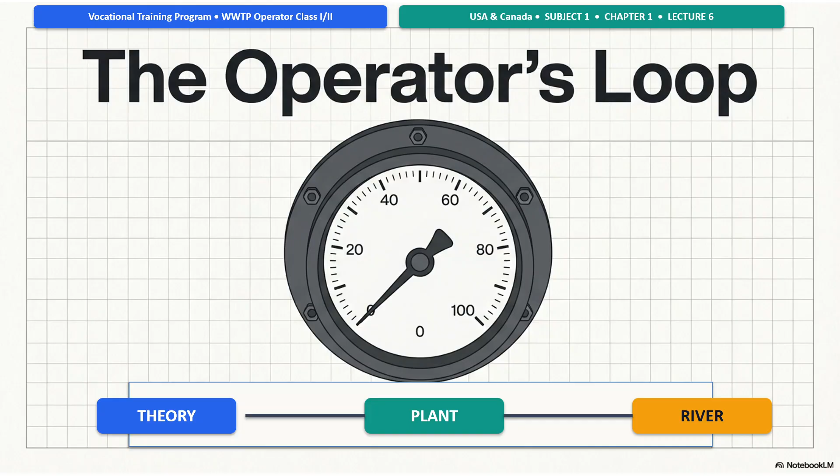Before we touch any wastewater words, I want you to notice something. When you cook, you don't just follow a recipe. You think, what is happening in the pan? What is it costing me? Is it safe? Will it turn out okay? That is not school thinking. That is real life thinking.

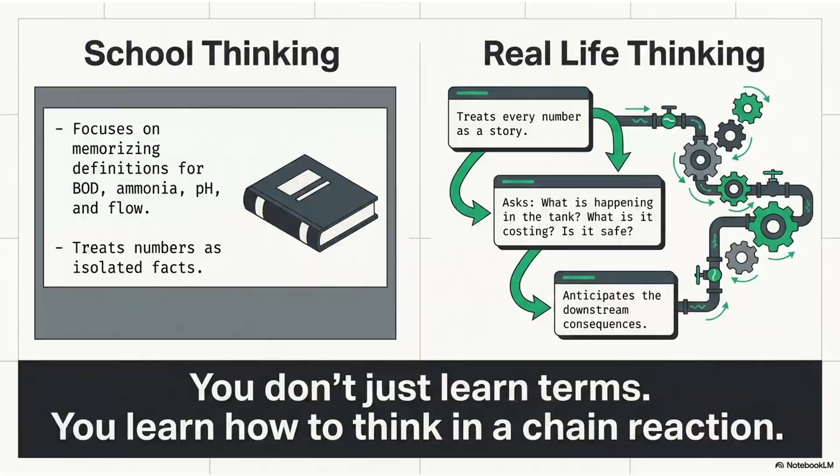Today I'm going to show you the most important thing an operator learns. You don't just learn terms, you learn how to think in a chain reaction. Because in this job, nothing is just one number. Every number is a story, and every story has consequences somewhere downstream.

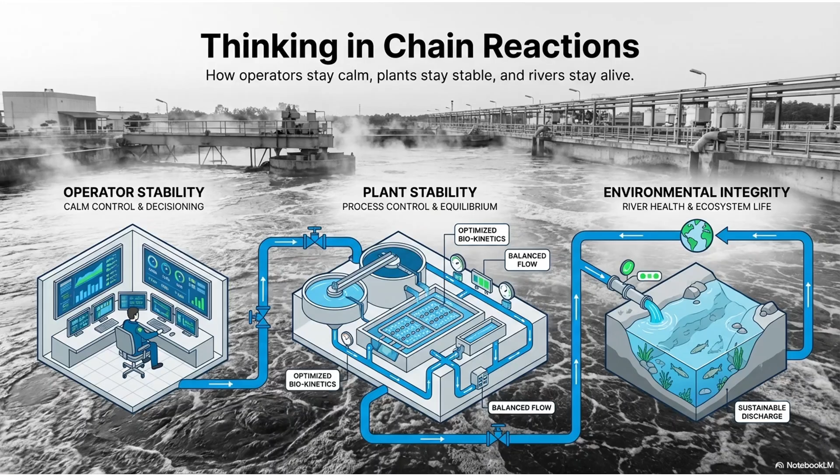So here's the promise. From today onward, whenever you hear a wastewater term, BOD, ammonia, pH, flow, you will not just memorize it, you will run it through a loop. This loop is how professionals stay calm, how plants stay stable, and how rivers stay alive.

Picture the plant like a living city. It has streets and gates. It has workers. It has rules. It has a rhythm. And most days, the rhythm is predictable.

But today, it's Monday. Rain is falling, the streets are shiny, the storm drains are awake, and somewhere upstream an industrial building opens a valve. Maybe they cleaned a tank. Maybe they dumped a washdown. Maybe it was an oops.

But here's what matters. A stronger than normal slug hits the sewer. Not a little change, a sudden punch. The wastewater comes in thicker, darker, heavier. And the lab tech at your wastewater plant looks up and says, 'Influent looks strong today.' You hear one phrase from the control room: high BOD.

Now I'll ask you something, and wrong answers are welcome. What do you think happens next? Does the plant remove it all? Do the bacteria just feast on more BOD automatically? Hold those thoughts, because now we're going to run this event through the operator's loop.

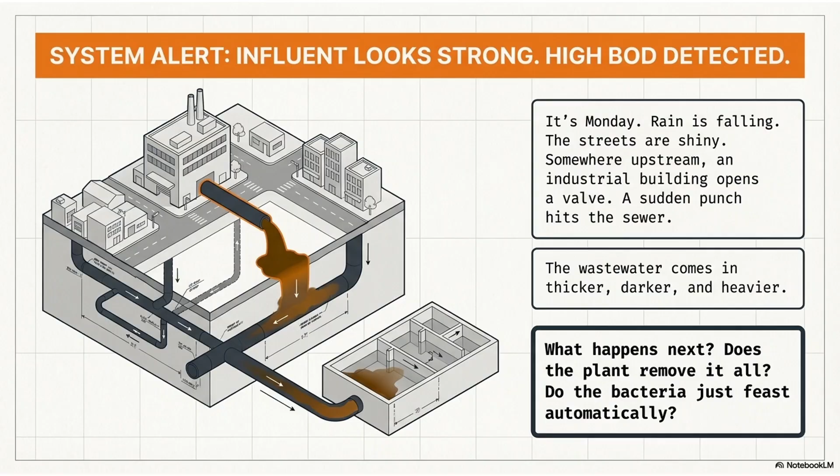What does this mean chemically? What happens in the tank? What happens to cost? What happens to safety? What happens to compliance? And then one final zoom out: what happens to the receiving river?

This is the theory, plant, river loop. Not because you're trying to be philosophical, but because this is how you avoid getting blindsided. This is how you stop being the person who reacts late. This is how you become the person who predicts the movie before it happens.

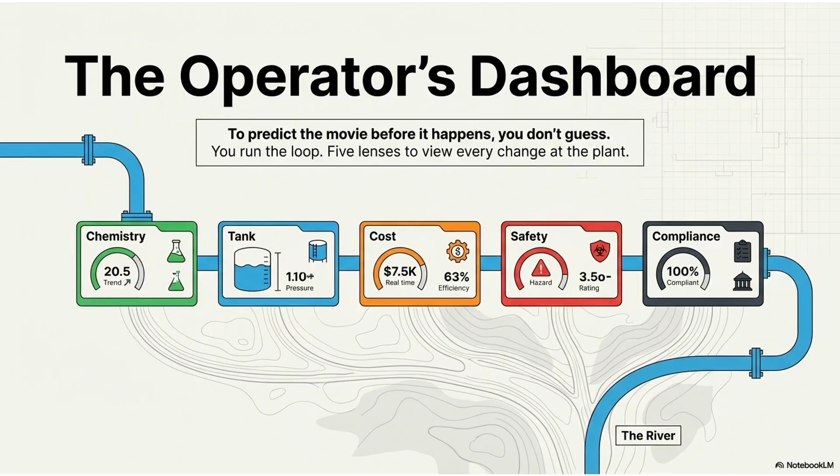All right, high BOD event. Let's run it. Loop step one: what does this mean chemically? When we say high BOD, in plain language, we mean there is more oxygen hunger entering the plant. That's it. More food for microbes, yes, but more importantly, more demand for oxygen.

BOD containing waste is like a crowd walking into a small restaurant. The restaurant only has so many chairs, only so many cooks, only so much air inside. If 20 people walk in, the room is fine. If 20,000 people walk in at once, the restaurant is stressed. There is a possibility that the restaurant does not have enough resources to feed the hunger of all 20,000 people because the load is too sudden and too high.

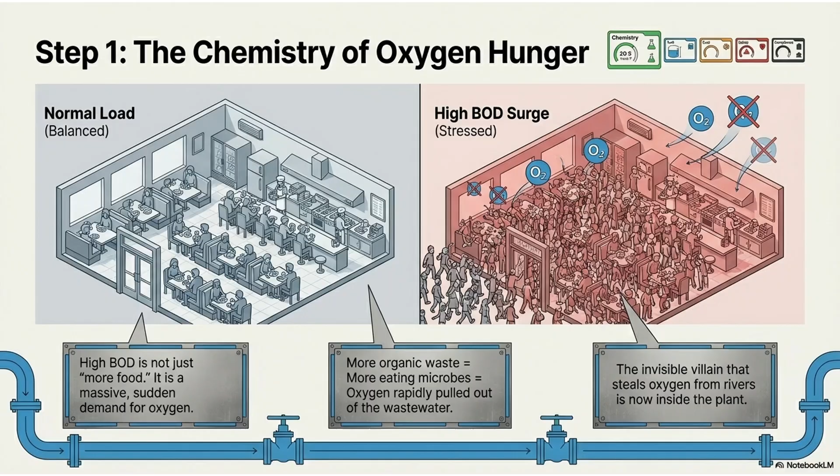So chemically, high BOD means more organic waste has entered, more microbes will be eating, more oxygen will be pulled out of the wastewater by these microbes. I want you to connect this to what you've already learned earlier in this subject. We talked about invisible enemies. We talked about BOD stealing oxygen from rivers. Now we're seeing the same villain, but inside the plant first.

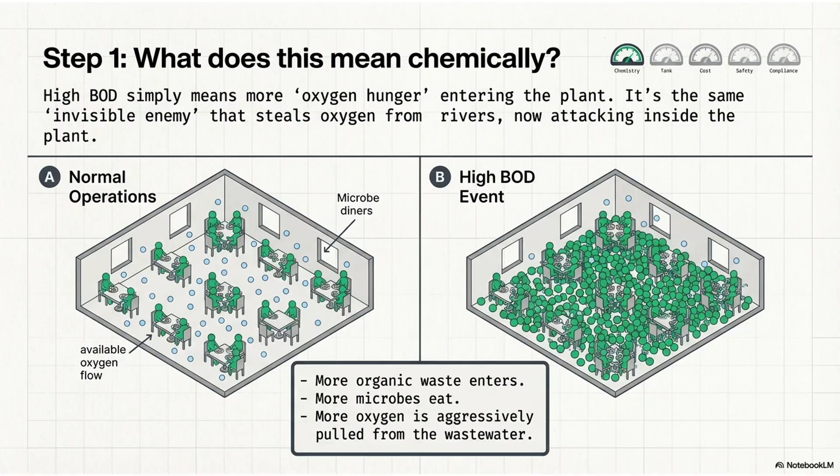Same villain, different scene. Loop step two: what happens in the tank? Now we zoom inside the aeration basin. I want you to imagine you're in the tank.

You're not a student, you're a tiny worker. You're a microbe. You live in this brown water city. Your job is to eat waste. And today, food is raining from the sky. At first, you're excited. You're excited to achieve your life's purpose.

You happily eat, breathe in oxygen from the water, multiply to create more microbes like you. They eat, they breathe in oxygen, they create more microbes like them. It's explosive growth. The sudden rain of food has allowed you to create billions of great-grandchildren microbes in no time.

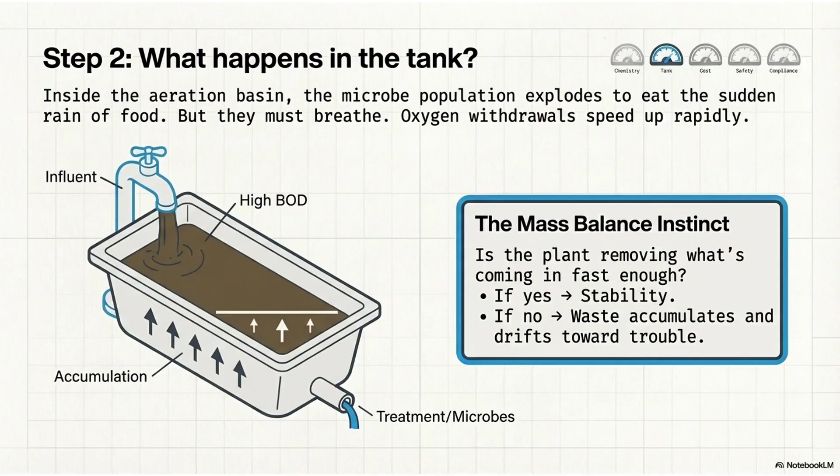But then you start to realize that with every bite your microbes take, they must also keep breathing in oxygen. But oxygen is very limited in this water, and it is starting to run out. So what happens when high BOD hits? The oxygen withdrawals speed up.

Now think like an operator. If withdrawals increase, what must happen? Either you increase oxygen supply, or oxygen in the tank drops until the microbes can't breathe, and then they start to die. That's not advanced science, that's common sense.

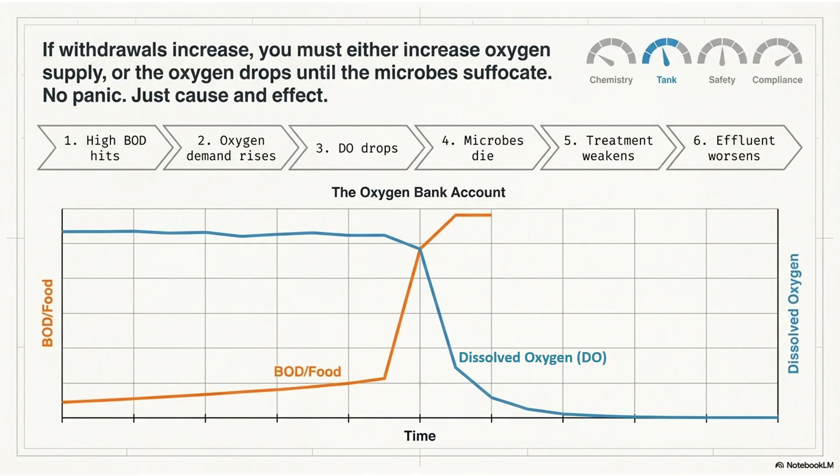Now listen carefully, because this is where we plant a seed that will later become math, but right now it's just logic. If more BOD comes in than the microbes can eat, what happens? Pause. Say it out loud if you want. The BOD builds up. The BOD accumulates. And if the BOD builds up in the plant, where does it eventually go?

It goes out of the wastewater treatment plant without being fully destroyed. It becomes effluent. This single idea is your first mass balance instinct. Not an equation, a question: Is the plant removing what's coming in fast enough? If yes, there is stability. If no, the waste will accumulate and drift toward trouble.

You don't need to see letters and formulas to understand this. You need to feel it as a story. A bathtub with a drain. If the faucet is faster than the drain, the tub rises. Same logic, different place. And now you can sense the chain reaction beginning: high BOD, oxygen demand rises, dissolved oxygen in the water can drop, microbes can start to die, treatment can weaken, and effluent can worsen. No panic, just cause and effect.

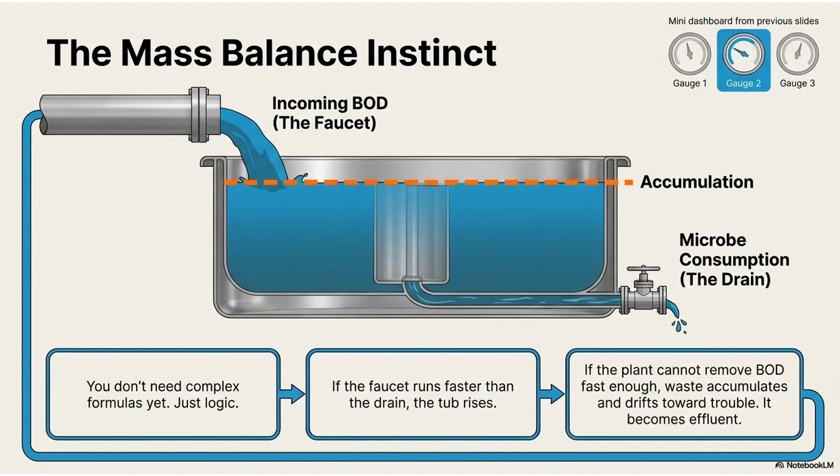Loop step 3: What happens to cost? Now the camera leaves the tank. We walk into the blower room. This is the room where the blowers supply bubbled air to the wastewater inside an aeration tank. It's loud in the blower room, and it's hot. But this is the heartbeat of the plant.

Here's the rule: when oxygen demand rises, air equipment works harder to supply air bubbles to the aeration tank. Harder work requires more electricity. More electricity requires more money. So a high BOD day can cost the plant in ways people outside never see.

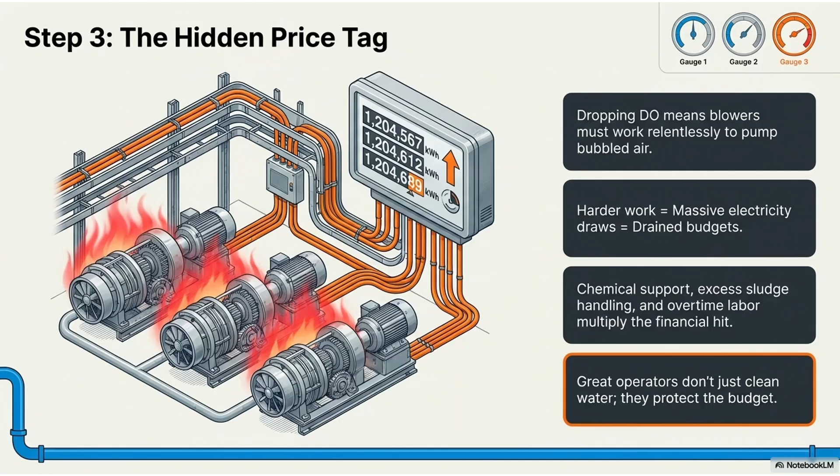And it's not just power. If the plant responds by adding chemical support, that's cost. If the plant produces more sludge that must be handled, that's cost too. If the plant becomes unstable and needs overtime labor, that's cost too. This is why operators who understand the loop become valuable. They don't just keep water clean, they protect budgets.

And exam writers love this kind of thinking. They ask questions like: which operational change increases energy use? What condition leads to higher aeration demand? If you can run the loop, you don't guess, you reason.

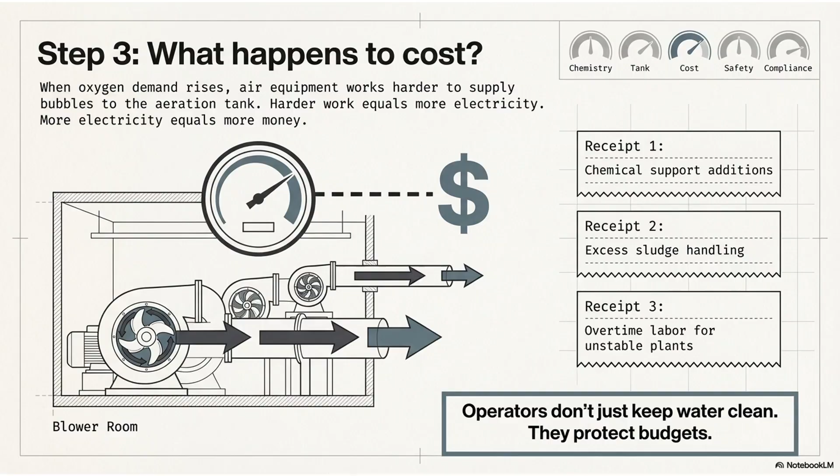Loop step 4: What happens to safety? Now we turn to the one topic plants can never afford to ignore: safety. Here's how I want you to think. Safety is not a separate checklist floating in the air. Safety is what happens when chemistry and equipment meet reality.

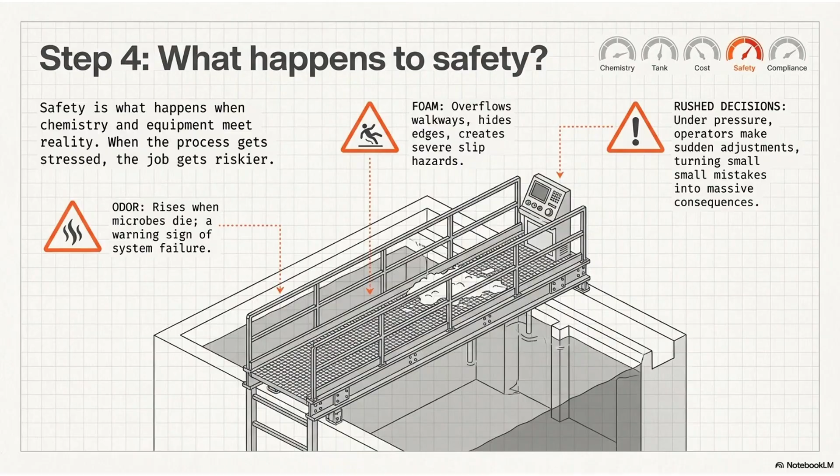If oxygen suddenly drops and the microbes start to die, odor can rise. Odor isn't just unpleasant, it can be a warning sign. If processes get stressed, foam can show up. Foam can hide walkways and edges and create slips. If operators rush to make sudden adjustments under pressure, mistakes can happen. And in a plant, small mistakes can become big consequences.

So you learn this mental habit: when the process gets stressed, the job gets riskier. This is why predicting the movie early is safety.

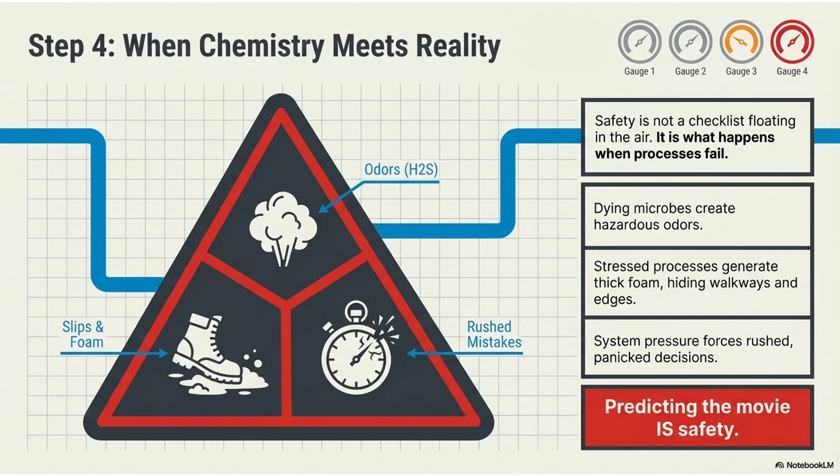Loop step 5: What happens to compliance? Now we enter the world of the permit, the guardrail. Remember the earlier lesson? Compliance is not hitting the guardrail. So the question becomes simple: If BOD removal weakens, what happens?

Effluent BOD rises. If effluent rises, what happens? You move closer to the regulatory limit that has been set for BOD level in effluent wastewater. And if another stress hits—rain, flow swings, temperature changes, power outage—your safety margin shrinks even further. This is the key idea: compliance is the final report card of every internal decision. Even if the plant feels okay, the numbers may be drifting.

And exam questions are built exactly like this. They don't ask you to recite poetry. They ask: what happens to effluent if influent strength increases? What is the risk if DO cannot keep up with incoming BOD waste? Which change could push the plant toward a violation? This loop gives you a map.

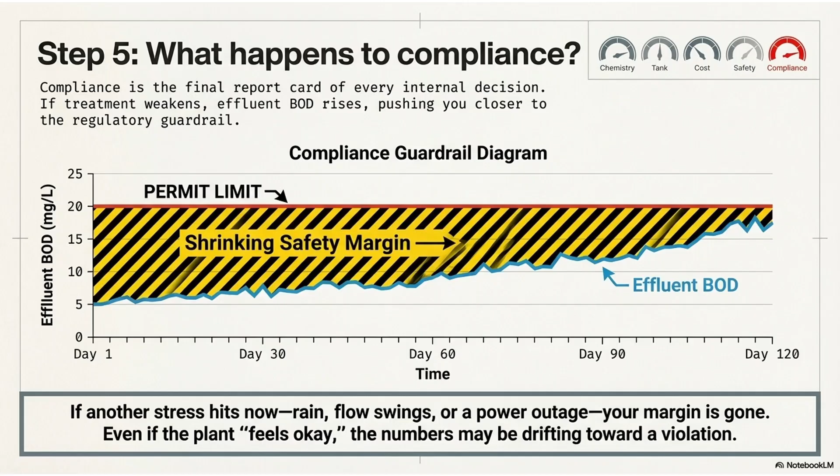Now let's zoom out. We leave the plant fence line, we follow the outfall pipe, we enter the river. And we remember the downstream neighbor story. If effluent BOD rises, the river's oxygen gets pulled down. Fish don't read reports. They only feel the oxygen decline. Kids skipping stones don't see lab sheets. They see the floating fish. They see the dead zones.

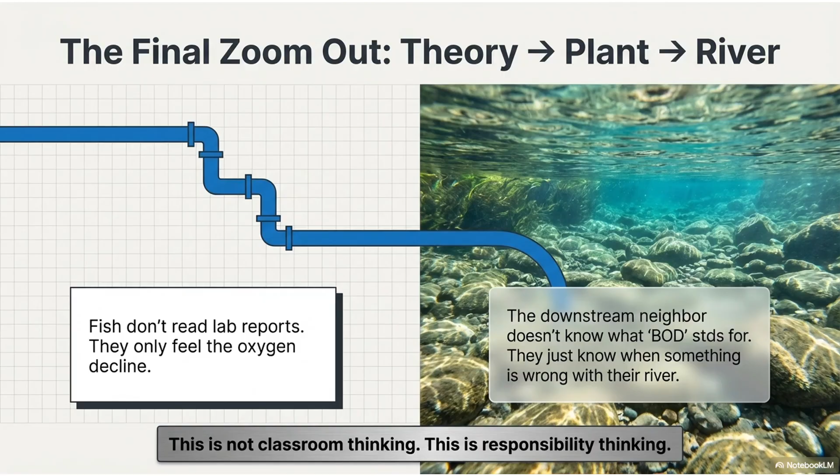The downstream neighbor doesn't know what BOD stands for. They just know something feels wrong with our river. That's the final purpose of the loop: theory to plant to river. This is not classroom thinking. This is responsibility thinking. Now imagine you're sitting in an exam.

You see a question: Influent BOD suddenly increases. What is most likely to happen? The best way is to run the loop in your mind. Chemically, there is more oxygen hunger. Tank: dissolved oxygen goes down, treatment tank gets stressed. Cost: demand for air supply or aeration goes up.

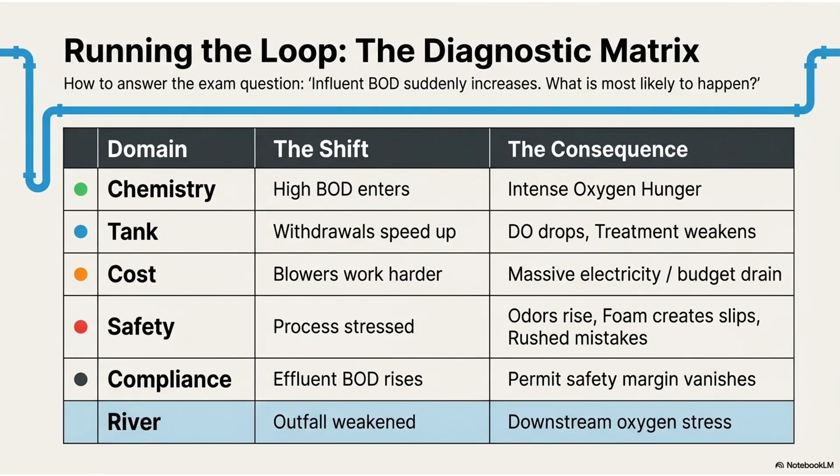Safety: there is higher risk of system getting upset, risk of odors, foam, rushed decisions. Compliance: effluent BOD could rise. The BOD levels get closer to regulatory limits. The margin shrinks. River: oxygen stress is added downstream. Great! You just answered 5 questions without memorizing 5 facts.

In summary, you are not just adjusting a blower. As an operator, you are managing oxygen debt. And here is a sentence you can carry for life: if more goes in than comes out, something builds up. And when something builds up, somebody must pay. This loop is your compass.

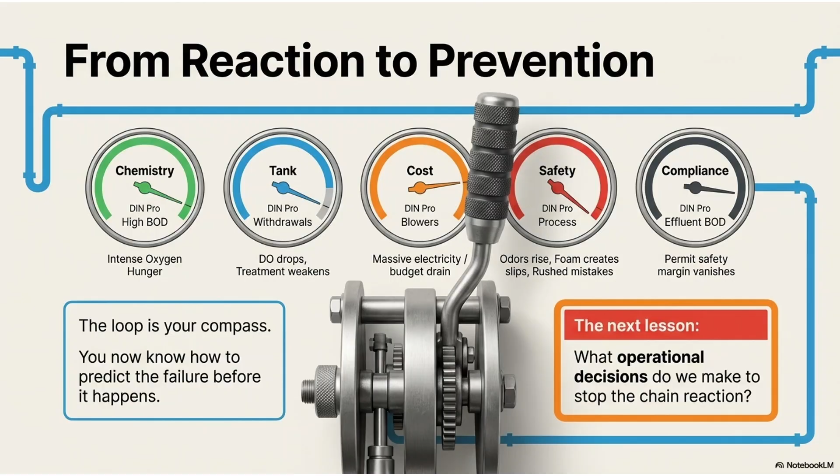Now, here's the question that leads us into the next lesson: What decisions can I make to prevent system failure?